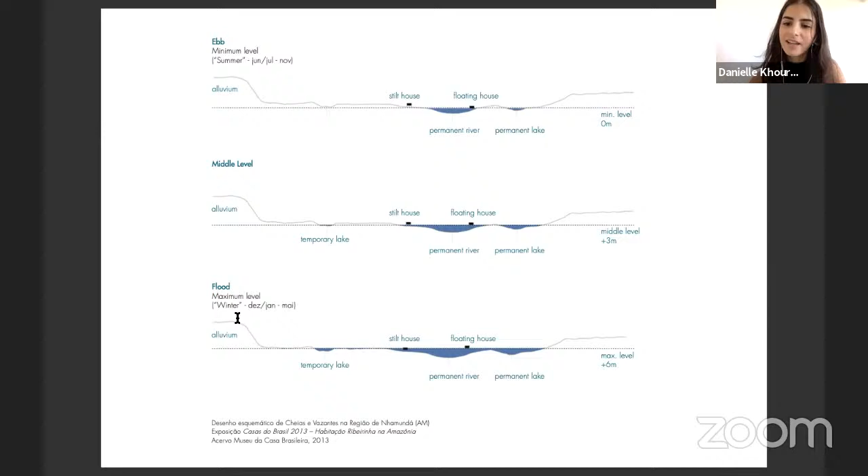Depending on the time of year, the width and extent of riverbeds change, islands disappear and reappear, and lakes and ponds expand and contract. The rhythm of the waters not only changes the landscape, but also influences the life of the riverside populations, who have adapted their way of living to this annual variation.

In this way, the rhythm of the waters imposes the rhythm of life in the Amazon. Inhabiting the floodplain area requires adapting to the hydrological cycle of the rivers, and the adaptation of the population to the local environment is reflected in their traditional architecture.

There are basically two different types of housing, the stilt and the floating houses, and both present solutions that bring inventiveness and adequacy between technique and the environment.

The stilt houses are built on wooden pillars. They have a simple configuration, usually with only one room that works as a bedroom, a living room, and a kitchen. This type of layout allows good ventilation of the internal space of the house, being an example of an adaptation to the local climate.

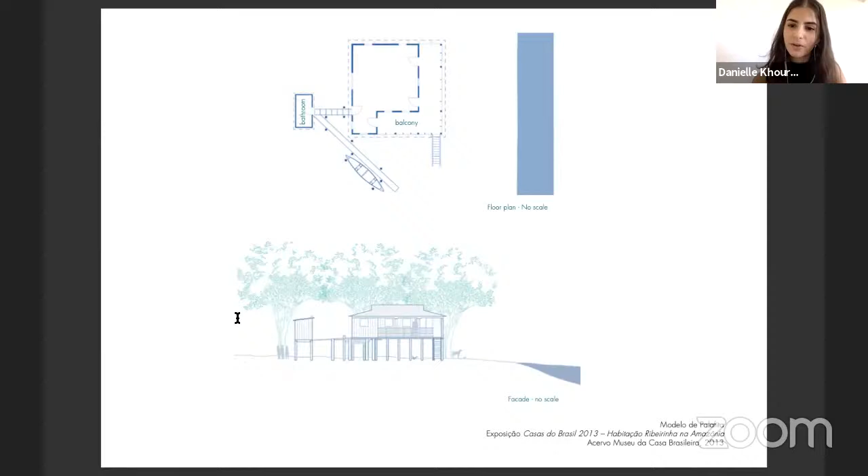The house is built using local materials found in abundance, such as wood, jungle vines, and leaves. Floating houses resemble the stilt houses in the choice of construction materials and layout, but differ in that they are not attached to the ground. They float on water, being able to change places, and in addition have the advantage of being less vulnerable to river floods and ebbs.

The traditional house is built on logs of açacu, a light wood with low density that floats on water. It is a typical tree of the floodplain forest, so it's very resistant to water and can be used for more than 40 years. This traditional architecture was the main inspiration for my project.

The project proposes a housing complex in the city of Manaus for the low-income riverside population living in precarious and risky situations. Manaus is the biggest city in the state of Amazonas, located in the center of the Amazon Basin at the strategic confluence of the Negro and Solimões rivers.

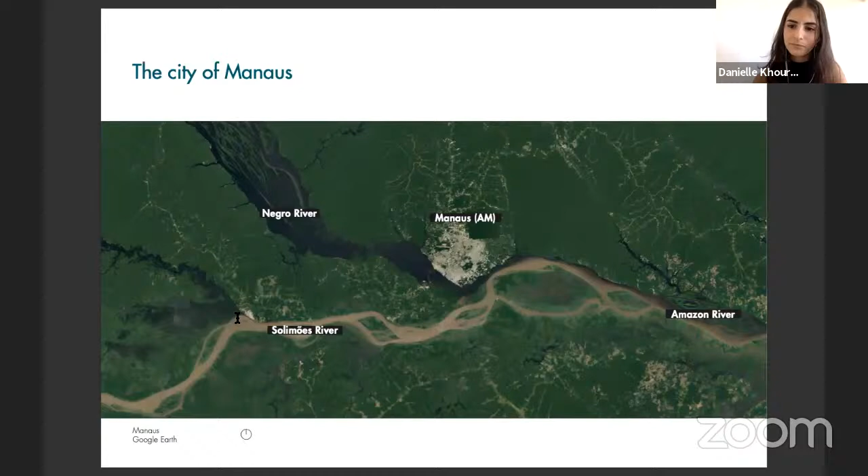The city faces today a major housing crisis. With the lack of public policies and efficient urban planning, part of the population began to live on the banks of the rivers in an inhuman and precarious way. In these occupations, the lack of sewage and garbage collection is frequent, aggravating the environmental degradation of those areas and facilitating the spread of diseases.

Some housing projects were built in response to these problems. However, in general, the architecture and way of life traditionally developed by the riverside populations were ignored, generating dissatisfaction and difficulty of adaptation by the relocated residents.

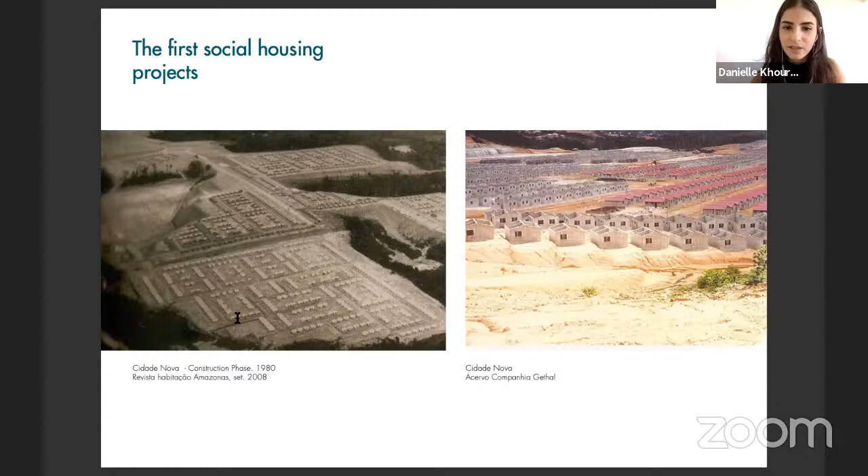The Brazilian social housing projects had mainly a productive and quantitative basis, and the production of constructively standardized buildings was intensified. Widespread formulas were adopted in many Brazilian cities, which disregarded urban, social, and cultural local specificities.

So this work is a criticism of the current production of generic models that ignore the particularities of the Amazon culture. It emphasizes the importance of rescuing the qualities of vernacular riverside architecture, incorporating features in its design familiar to the residents of stilt and floating houses. Therefore, it allows the residents to identify with the house while valuing the Amazonian way of life and local knowledge.

The housing complex is located on the banks of the Quarenta River, a region currently occupied by irregular stilt houses.

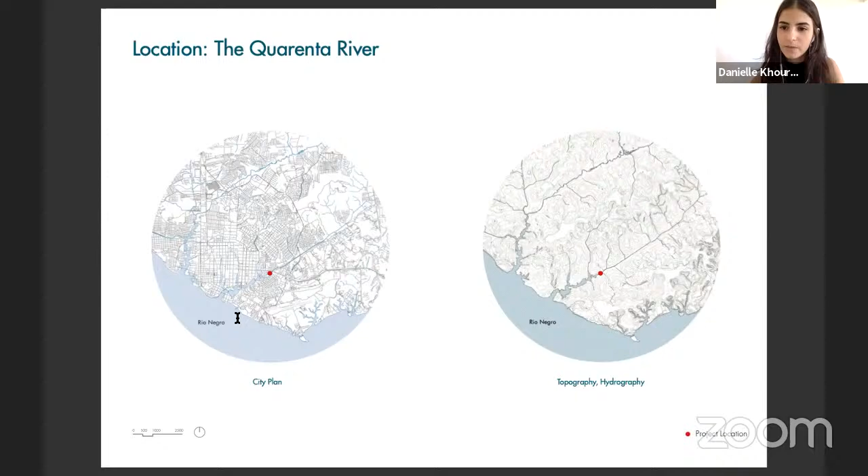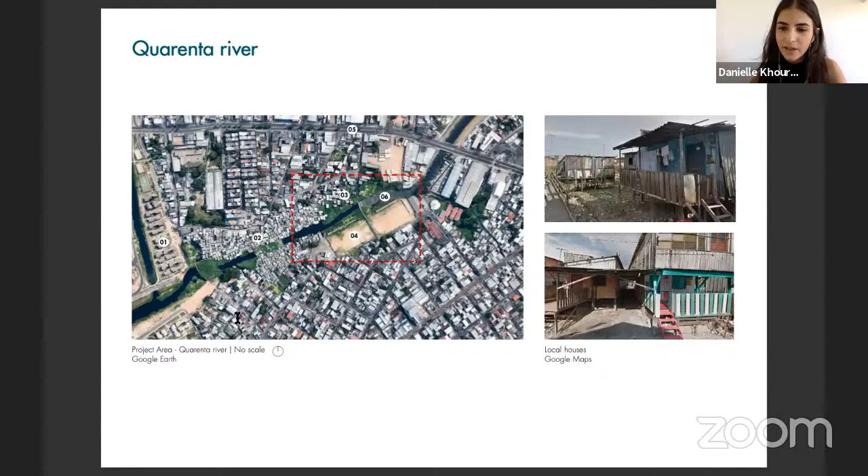The intention of the project is to provide a housing alternative to residents who live in dwellings at risk of flooding or collapse. The design of the housing complex was inspired by traditional Amazon architecture in such a manner that the building is in harmony with the people and the natural landscape.

The level of the Quarenta River has an annual variation according to the seasons of floods and ebbs, and this variation was taken into account when developing the project. The results of the analysis led to the establishment of 3 distinct levels: one variable according to the water level of the river, one at the level of the street, and a third one elevated.

At the variable level, a space is created for diverse uses like resting and fishing, allowing for a continuous dialogue with the local landscape. At the street level, there are spaces for social and cultural activities, and the dwellings are located on the upper floor.

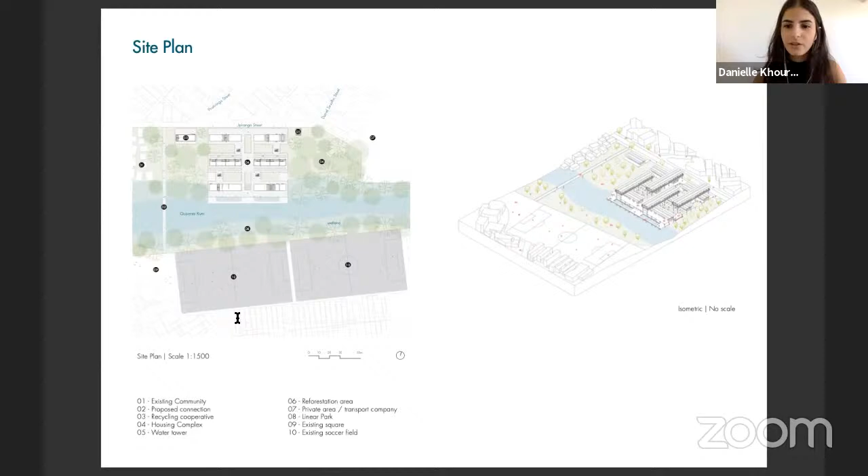The building's implementation was designed to ensure harmonious integration with the surroundings. A connection with the other side of the river is proposed, facilitating access for the region's residents into the cultural spaces situated in the housing complex, and at the same time integrating the leisure areas located on the opposite bank.

The building is not only restricted to housing use, but also serves a purpose in providing social facilities, markets, and spaces for leisure and rest — features that are essential for human development.

An emphasis was placed on programs associated with job creation in an educational and cooperative manner, using local know-how to generate income, like a fish and fruit market, a boat building school, a bakery school, and a recycling center. The project also holds a canoeing club, which promotes physical activity and reestablishes the relationship between man and water. In addition, the housing complex has ample external spaces, encouraging contact with nature and promoting community life.

So the project not only offers quality housing, but also a space that fosters culture and leisure activities, and as a result, a sense of community is created and empowered. Access to those activities is intended not only for residents of the building, but also the surrounding communities. In that way, the project generates a micro-local economy and a cultural center for the region.

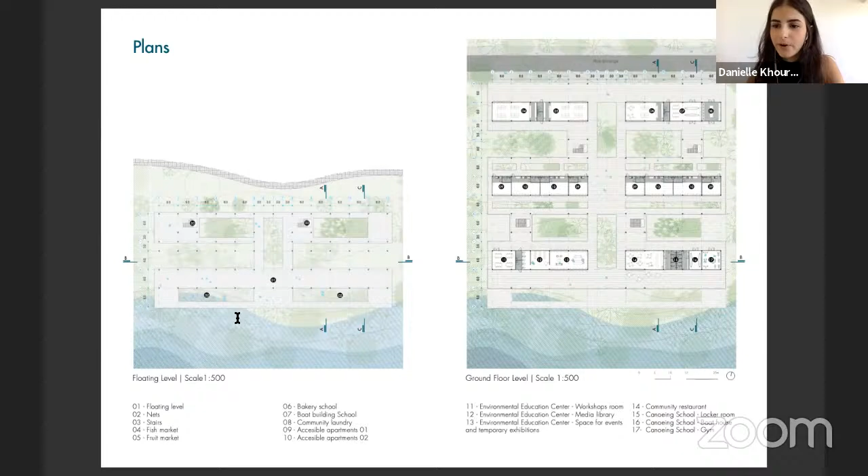Close to the river, we have the cultural and social spaces like the canoeing club and the community center. In the middle, there are the apartments for physically impaired people and the elderly. And parallel to the street are the markets, the bakery, and the boat building school.

Here you see the upper floor where there are the other apartments, and on the right, the roof plan with the solar panels. Here we see sections and facades, and this is a section in perspective showing the 3 levels.

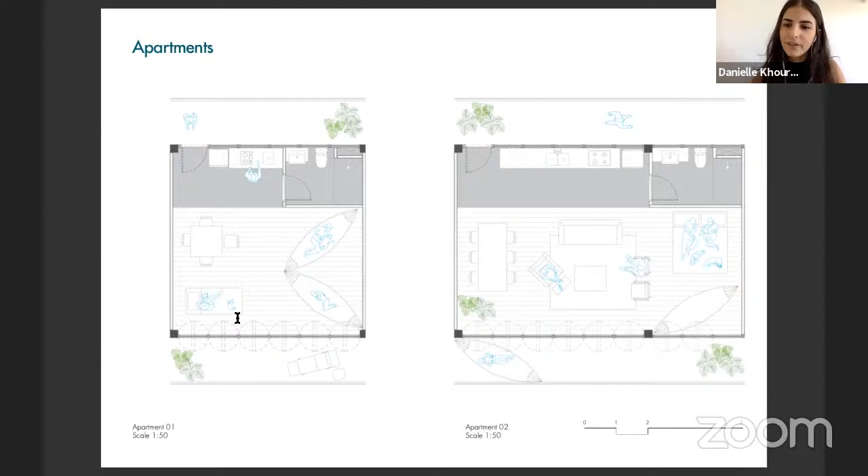There are 2 types of apartments, one with 36 square meters and the other with 54 square meters. The units have few internal partitions inspired by the typical floor plan of the riverside dwellings, and the idea is that residents can adapt the units according to their needs. These are the units from the ground floor that are adapted for wheelchairs.

The material used for the main structure is Itaúba, a local wood with high durability and resistance to humidity. It is used in the pillars, beams, and trusses, and the advantage of using reforested wood is that it absorbs carbon dioxide during growth and generates less residue during the construction phase.

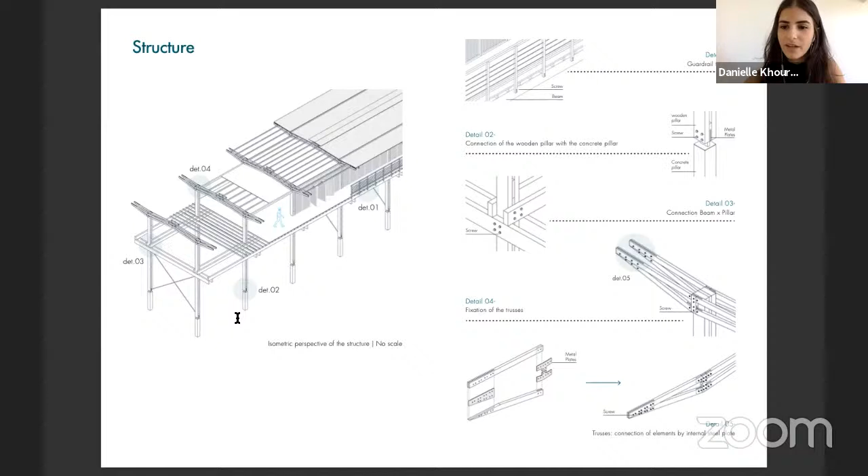The pillars are made of wood and concrete, and this second material is used at the base of the pillars where there is direct contact with water, ensuring greater durability of the structure and preventing damage to the wood. The roof plays a fundamental role in guaranteeing thermal comfort to the building, because it is through it that the greatest thermal load is transmitted.

So it was designed to achieve a good adaptation to the local climate. The roof has 2 layers: the outer layer shadows the inner layer and minimizes its heat absorption, avoiding the heating of the building's interior. The heat accumulated between the 2 covers is removed by ventilation through an upper opening.

The overhangs prevent direct sunlight from reaching the interior of the building during the hottest time of day, while also protecting it from intense rains. The high humidity and elevated temperature of the region can cause a constant feeling of thermal discomfort.

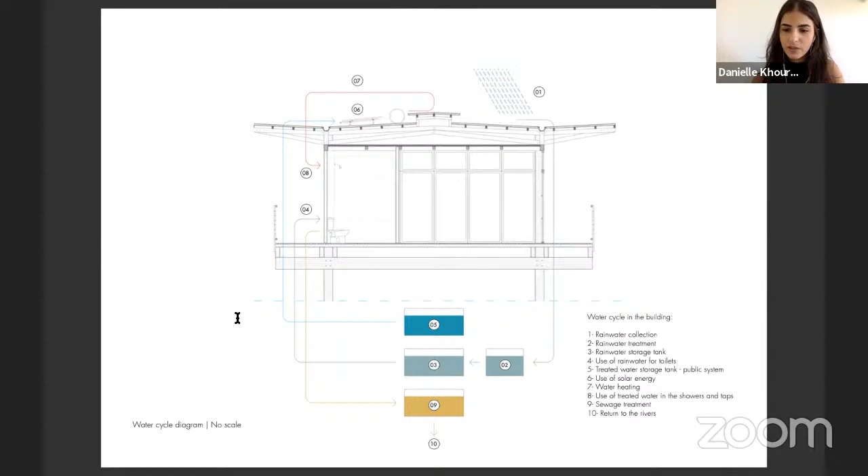Therefore, it is necessary to promote dissipation of heat through ventilation, and for this purpose the building is open to capture winds. This is done through external panels which have an area for permanent ventilation. The building is also elevated from the ground, providing better exposure to winds while also allowing air movement below it. Rainwater is harvested and utilized in toilets, and sewage water is treated so it does not further pollute the rivers.

Here we have some 3D images. This is a 3D image of the apartment. Another image from the apartment showing the large windows for ventilation, a view from the ground floor during the flood season, and a floating level with external spaces. This is the circulation and external area.

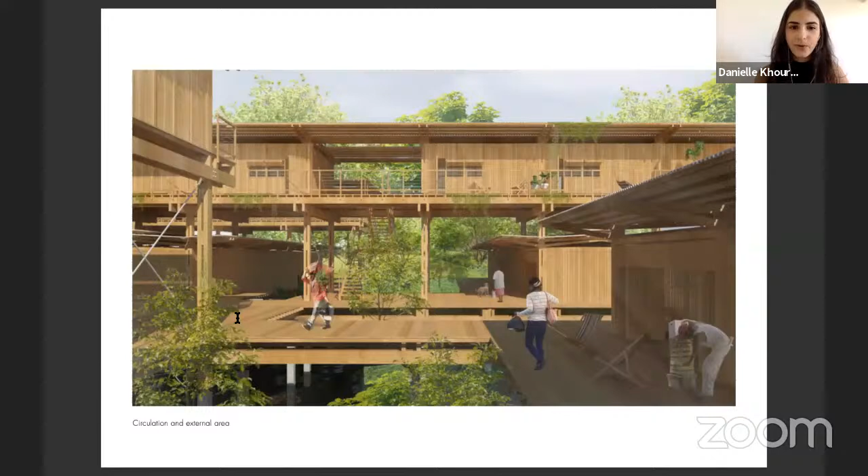Thanks a lot, Danielle. So we are now going to move on to Othmane. Yeah, can you hear me? Yes, perfect. I'll try to. So over to you. Share my screen. Just a second. Yeah, all good. All good? Please. Perfect. Yes.

Today I would like to present the work that we produced at the Polar Lab, which is an academic research platform of Antarctica 2020, a cross-disciplinary project that has an interest in conceiving and shedding light on a very mysterious continent, not very well known. In fact, for the 2020 anniversary, the project aims to freeze and map the evolution of Antarctic architecture and Antarctic climate, producing a body of research that would be debated at the next Venice Architecture Biennale.

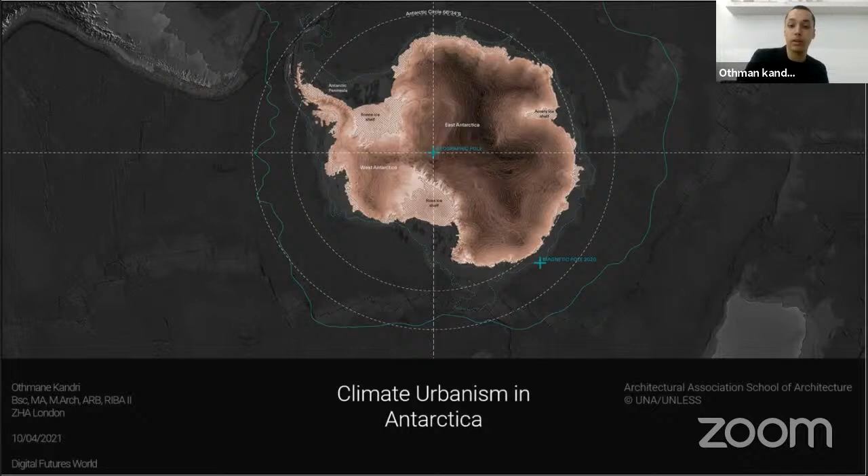Okay, so we can start with the geographical location of Antarctica, which is the Earth's southernmost continent, and it contains the geographical South Pole. It is situated in the Antarctic region, almost central south of the Antarctic Circle. Antarctica, on average, is the coldest, driest, and windiest continent, and has the highest average elevation of all the continents. Most of Antarctica is a polar desert, where about 80% of the world's freshwater reserves are stored, enough to raise the global sea level by about 60 meters if all of it were to melt. So try to think about the impact of this on our cities. The temperature usually varies from minus 90 degrees to 20 degrees Celsius.

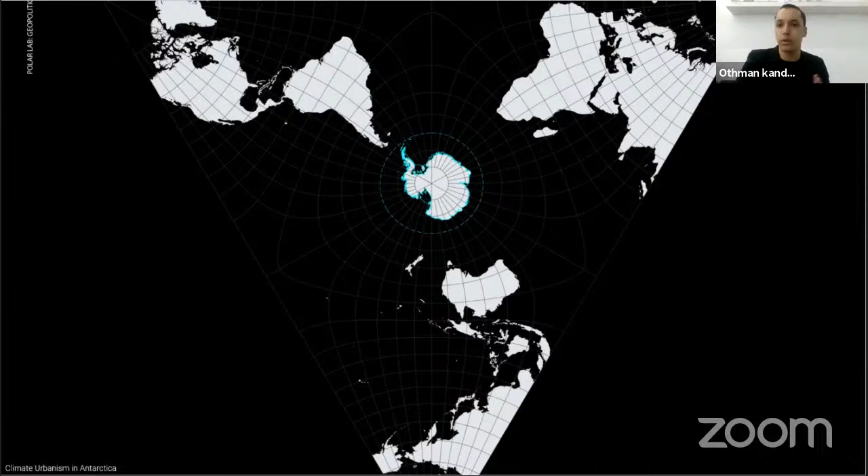The fast melting of the Antarctic ice cap induced by global warming will gradually alter the international geopolitics, because the territory of the Antarctic is a very important strategic outpost to ensure access to research and science that is done on site, and energy and commercial resources, as well as a very important military strategic area.

However, the science is very clear: climate change is already negatively impacting Antarctica, and the problem of human-caused climate change is now very well known, which is the concentration of greenhouse gases in the atmosphere, well above pre-industrial levels, due to our use of fossil fuels, but also deforestation, agricultural practices, and ultimately urbanism.

So each summer, a significant amount of meltwater is produced. The climate in Antarctica has warmed by 3 degrees, meaning that since the 50s, there has been a loss of almost 25,000 square kilometers of ice shelf.

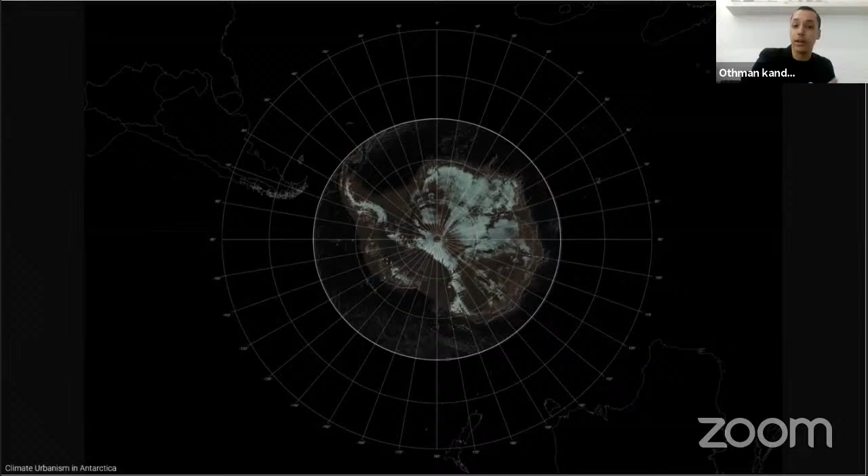Here we can see how during winter the continent creates new ice formed from the ocean water and general snowfall. When a certain threshold warming is reached, these regions might start melting significantly, and when the temperature comes down again, the ice will not immediately regrow. So we can read this continuous tension and compression of the entire system, based on one hand on natural behaviors, on the other hand on human behaviors that exist in Antarctica.

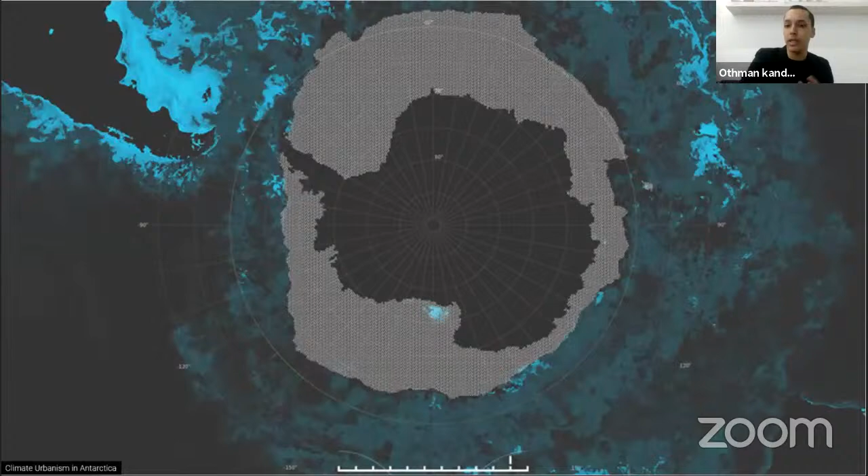Part of our agenda was to critically unveil and visualize this unique nature of human presence in this vast polar territory, because since the 50s, numerous research stations were built, introducing interesting typologies that look at technological solutions dealing with the climate and wind landscape.

As you see from this map, a number of governments have set up permanent research stations in Antarctica, widely distributed, constructed either on rock or on ice. There's a trend driving toward a sort of climate urbanism, based on the location of the base in the continent and on the political treaty. Most of them are located in a geographical area close to Argentina because of the shorter travel distance with ship and aircraft, and because of the warmer Antarctic surface temperature than in the central area.

So in the past 20 years, several research stations have been built, implementing building techniques that lead to development of mobile, responsive, but also zero emission structures. We tried to collect this data to map the architecture of the bases from several images, papers, and documents, and how the base is related to a specific climate and site.

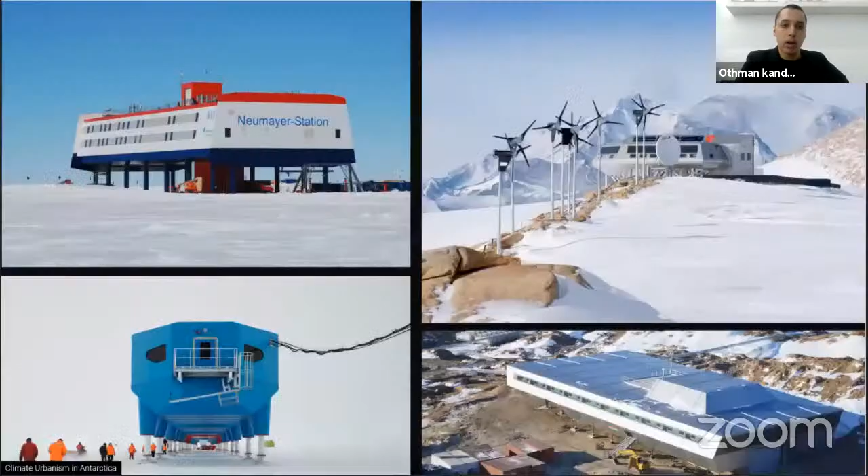To give you a little context of what it means building in Antarctica, these are very interesting examples. Most of the time, the client's brief is related to a typology easy to ship and build on site. The building has to allow for replacement of individual multiple facilities. They also try to minimize environmental impact with energy efficiency, reducing water use, improving waste management, and providing flexibility to support the scientific program done on site.

But looking at the same time at the wider context of the single base, there are interesting examples of territories like Punta Arenas and Hobart that become, in a way, the ports of entry into Antarctica. This strategic location promotes the development and flourishing of these places into logistic hubs. That's why the interest in urbanism, not only in the single architecture of the base, becomes even more relevant to address a sustainable order that considers the transportation of goods, waste management, and the construction of new infrastructure, minimizing gas emissions and land consumption.

Because this is the result, the idea of meaningful urban design is completely vague in a way, because there's an ambiguous mix of several issues to resolve within the site, such as the architecture of the base, the architecture of the landscape, and the overall planning of supporting infrastructure around the base. Questions arise, such as what is the relationship between the landscape and these new urban settlements, and what is the strategy to reduce the vulnerability of the climate and the overall natural ecosystem?

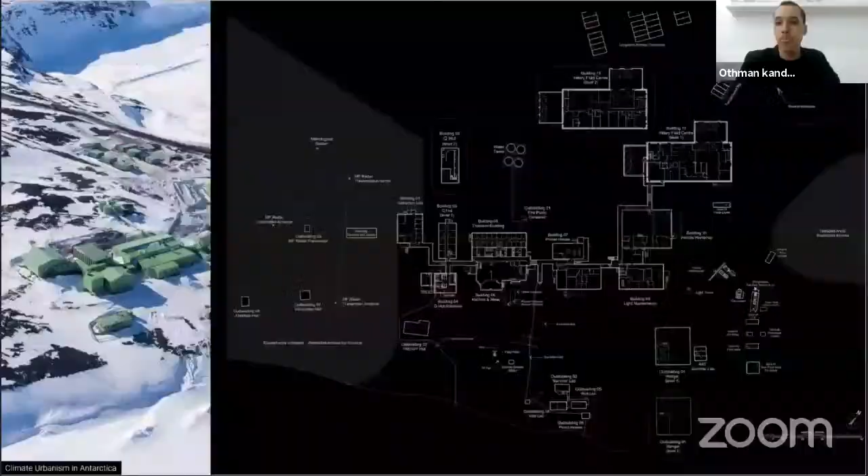This is a typological plan of a base. As you see, most of the time the result is a complex urban asset where the location of the central base deals with extreme climate and topography, as well as a huge amount of facilities necessary for the operation of the base, such as fuel tanks, workshops, power facilities, parking areas, and most of the time a runway for aircraft.

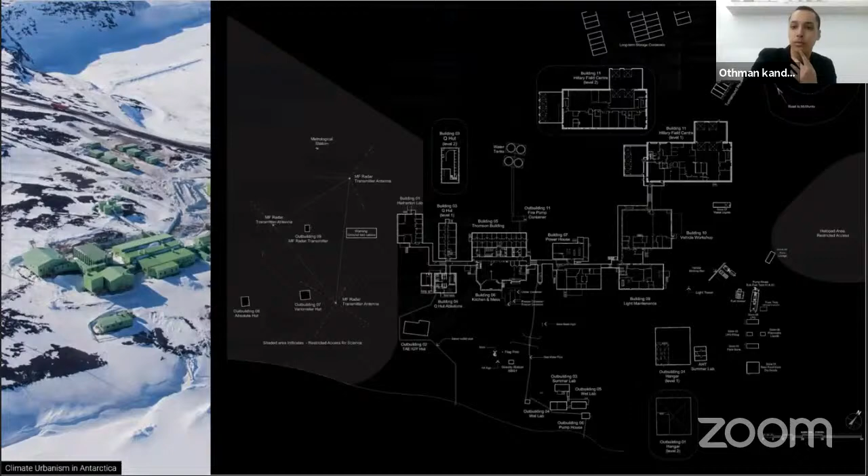An approach that transforms quantity into generic efficiency through compact massing and repetition. And it is also worth remembering that buildings in Antarctica probably have the largest construction carbon footprint of any buildings in the world.

We try to map this data. Everything has to be flown or shipped there, and anything that can fit into an aircraft has to be assembled elsewhere and then shipped several times—a process of accumulation that ultimately generates what we call today a city.

Mapping and visualizing this data allows us to run simulations through parametric design that visualize current and future scenarios of a specific base. As an additional study, we looked at the impact that each station had on its context.

According to its master plan and configuration, and numbers of elements such as equipment, logistic facilities, the number of buildings for each base, and the overall area that occupied the Antarctic soil. This gives us an overall idea about the energy production that every base needs to operate throughout the year and its carbon footprint.

That's why I think it's important to look at the continent as a unique urban asset towards net zero carbon emissions—establishing a representative network of marine protected areas which are less likely to change, implementing biosecurity measures, and putting into place a new management system able to incorporate climate resources and respond to new types of landscape urbanism. And this is my last slide.

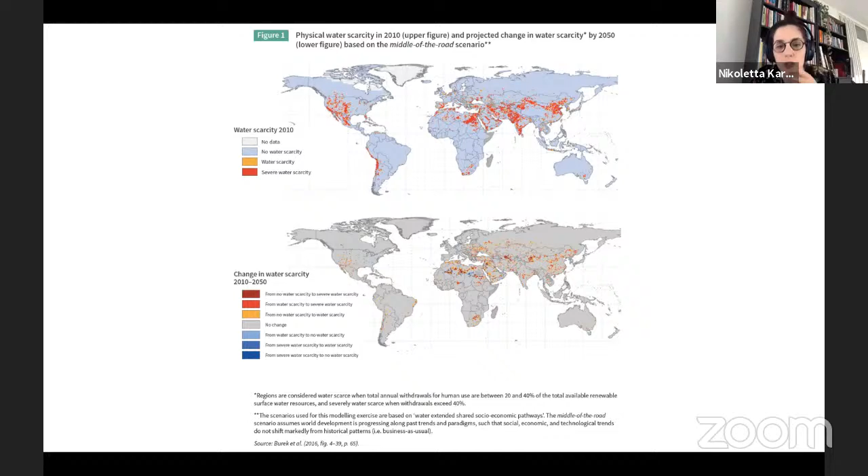One of the ways we can help provide water in some of these areas is through a fog harvesting system. How does it work? Typically it's installed in coastal areas or mountainous areas with high altitude. A cloud containing water particles passes through the tower or the mesh.

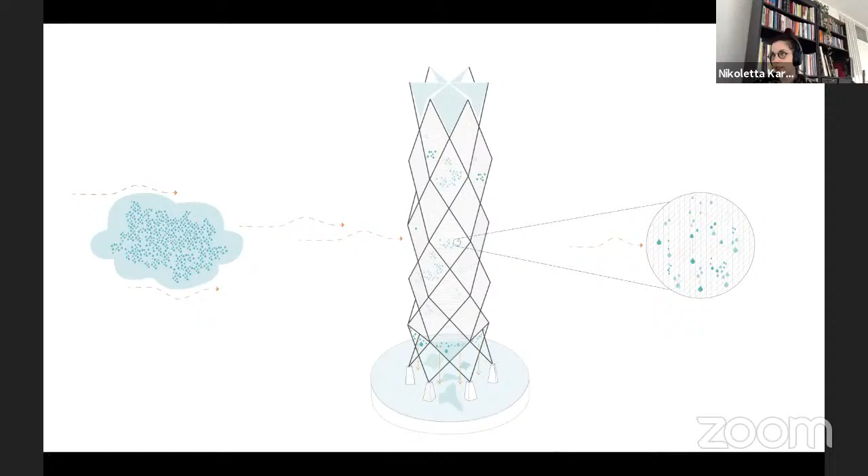The mesh captures those water particles, and with gravity, they travel down the structure and get gathered in a tank. Now Alberto will take you through the concept of the design.

Well, yes. So this is the first stage, the conceptual design that we started years ago, in which we define 4 parts of this conceptual tower.

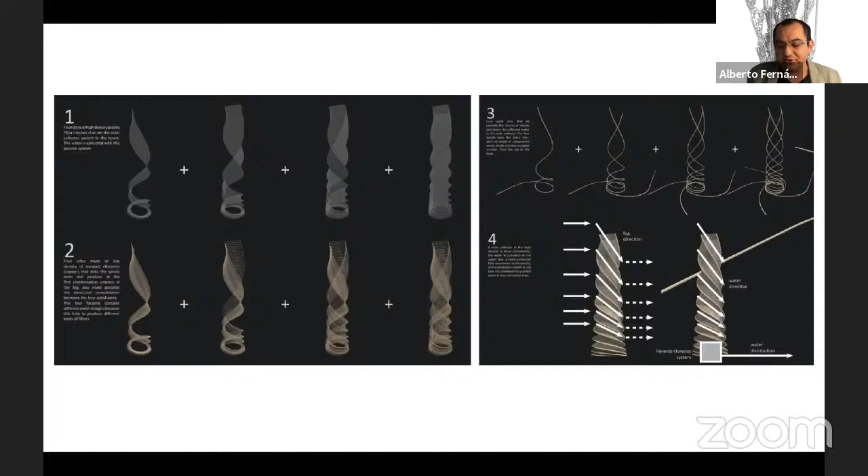The first one is the most important, the net that is capturing the water. The second one is the reinforcement system, a little framework that can reinforce the full system, trying to improve the quality of the water capture during the process. The third and fourth parts are more structural, but all together they create this idea of a vertical device that can capture and increase at the same time the contact between the net and the cloud, improving the quality and amount of water that we can get from the air.

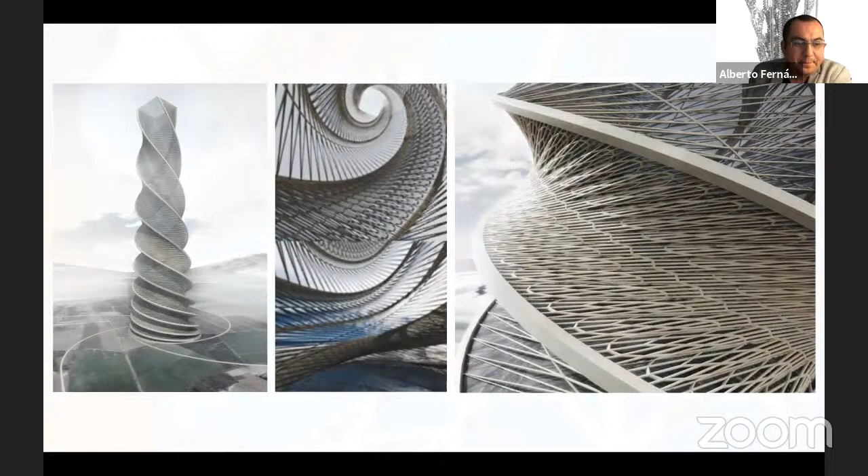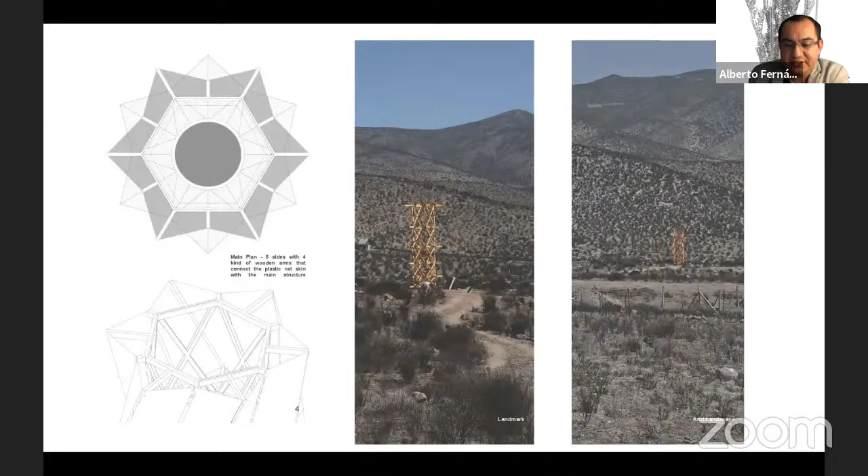Then we have the second stage, the structural prototype, with the main focus of trying to create a highly compact structure that can be easily assembled on site by 3 workers, with all parts no longer than 1.5 meters. So then the full system looks like this. This prototype was built in some hills in the north of Chile without any other things around it.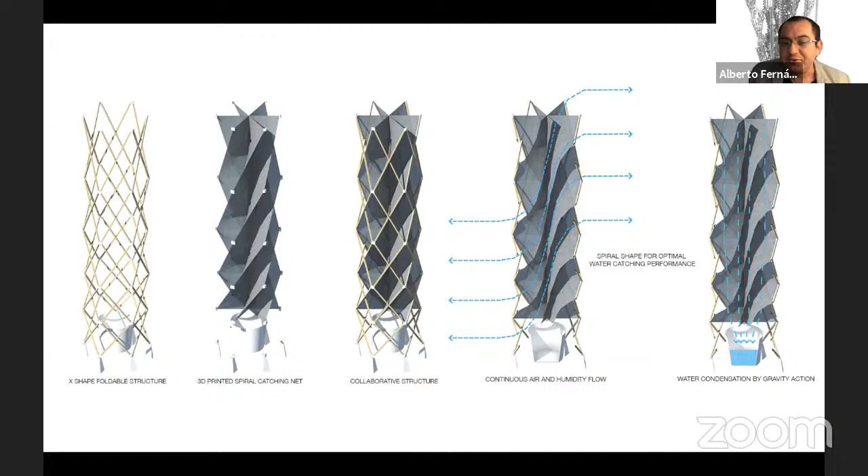Then we were working with 36 3D printed joints that can create this easy structure, in terms of having again 3 workers working just in one day, and the final result was this: near 10 meters height tower that can catch water in a vertical way.

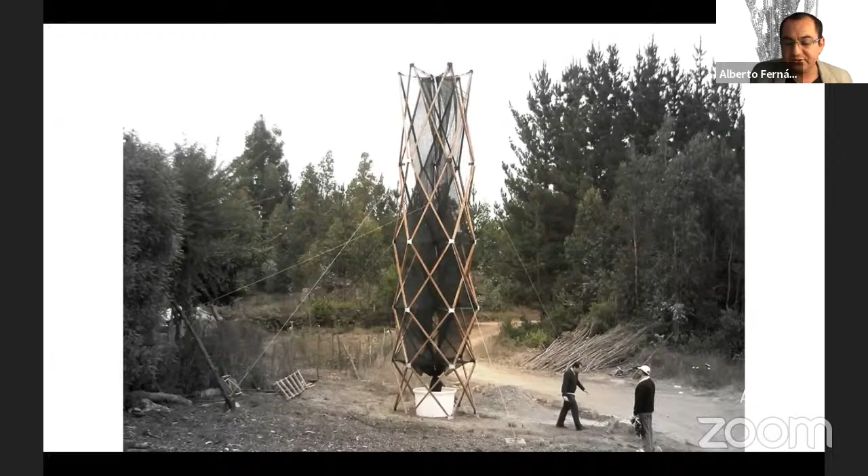So we have this focus about how to improve the quality of life for isolated communities or isolated families across these coastlines in all this South American area.

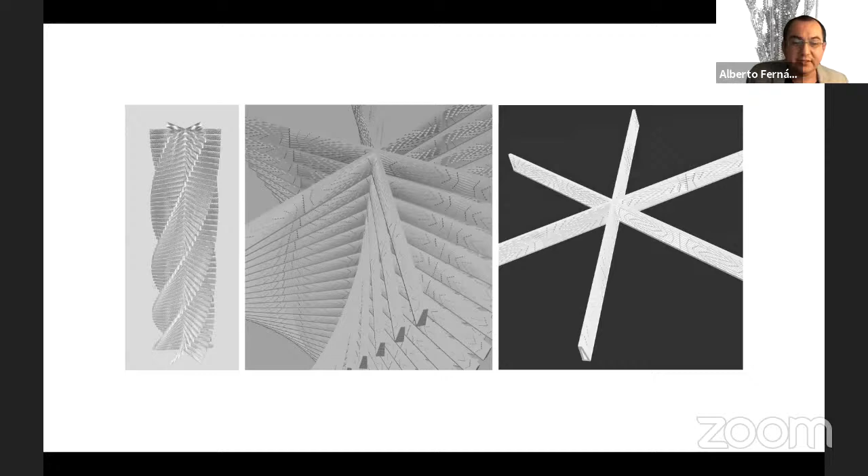After that, we realized that one of the most important things is trying to reinforce the capture structure inside these towers. So we started to think about 3D printing a secondary system that can collaborate in an active way with the net that is actively catching water. So we developed this visual algorithm that can create and iterate this idea of 3D printed blocks.

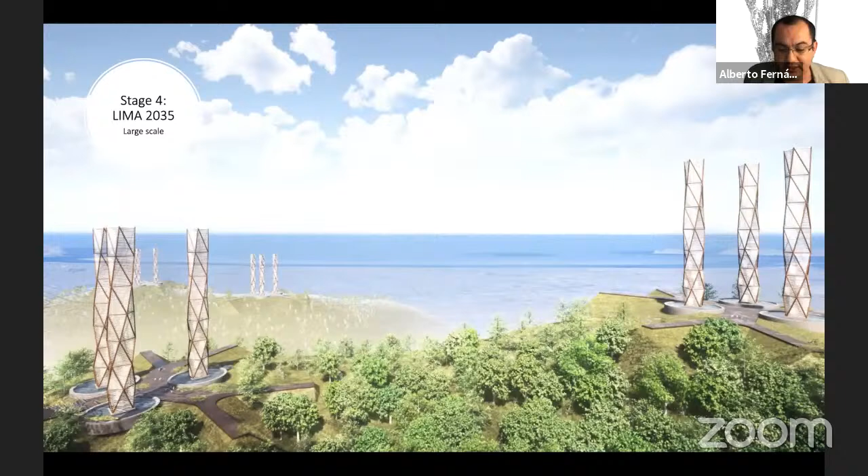And now we are working on stage 4, working with the organization Lima 2035, in collaboration with the Rockefeller Foundation and with local communities. So, a very brief information.

Now going to our current thoughts for the final prototype that would be in Lima: we're thinking of this prototype as a 2-system structure. One would be initially the more rigid, easy to assemble structure, and then we started to think about the idea of a component, because one of the main issues that fog harvesting towers currently face is maintenance.

The net itself gets torn apart quite easily. So if it's a component that fails, potentially you would be able to replace the component instead of the whole net, and you would have better control over the structure.

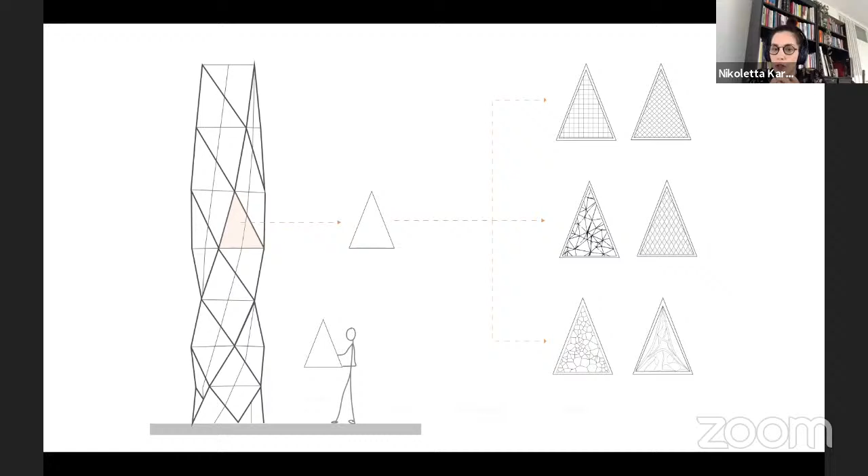And the other thing we're thinking is that you have the component, you have the textile structure, and then you also have an extra reinforcement, which could be 3D printed. Within that 3D printed mesh, we also started to think how we can maximize capturing water, maybe even by having small extrusions or things that would really help us capture the maximum amount of water.

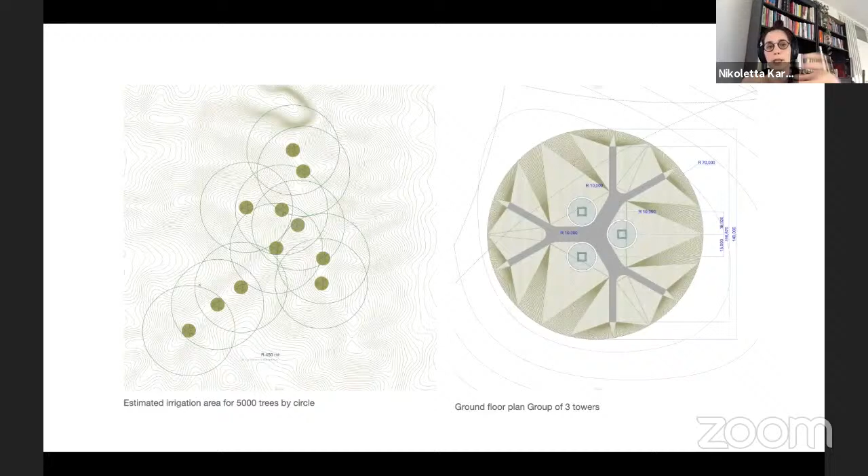So in the next slide, you can see there are 2 different types of prototypes. This one is a large scale prototype, and it has those 3 towers that work as a group together. These towers actually serve an irrigation area of 5,000 trees.

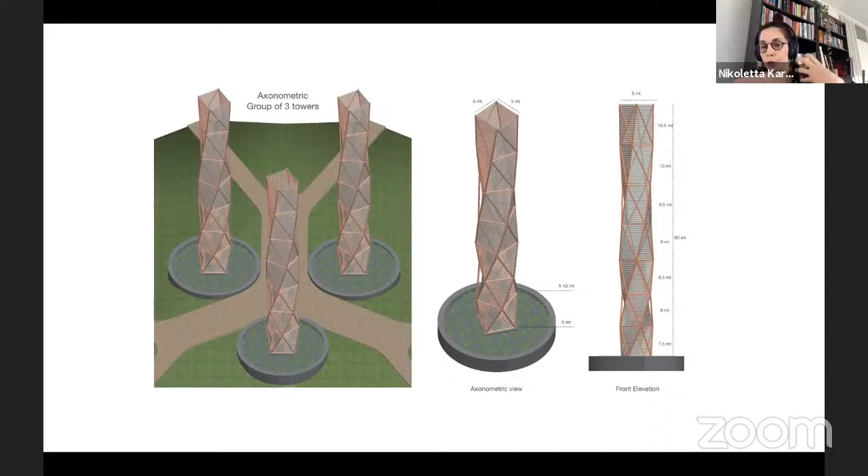It is important to note that to do this work, we really need to simulate and understand the wind pressure and how that affects our structure, and how through design, putting those 3 towers together, we can start maximizing the way we capture water through the various surfaces. So one tower is not as effective as 3.

In the next slides, you can see a few images of how we envision that potentially being part of the green regeneration and part of a public park.

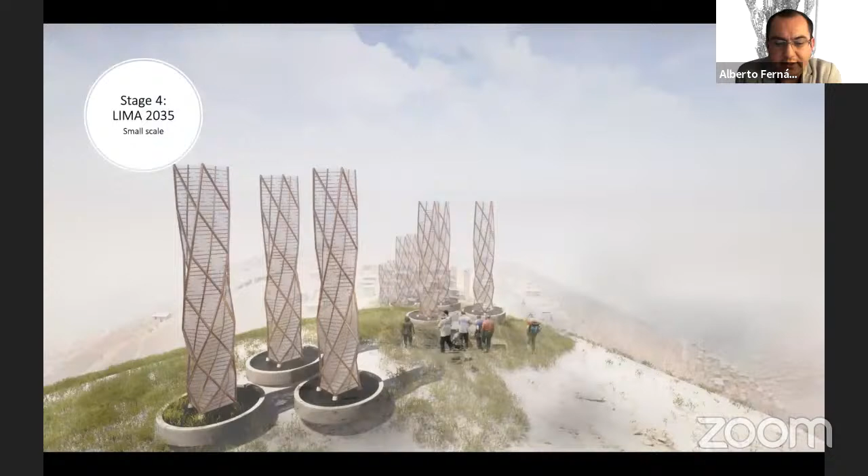In parallel, we have this other scenario, the small scale, working with local communities. In this one in particular, it's the Swan community in one of the hills in Lima. We're working with the same principle of 3 towers working together, with a total of 27 on this hill. We're now producing 120,000 liters per day at maximum capacity.

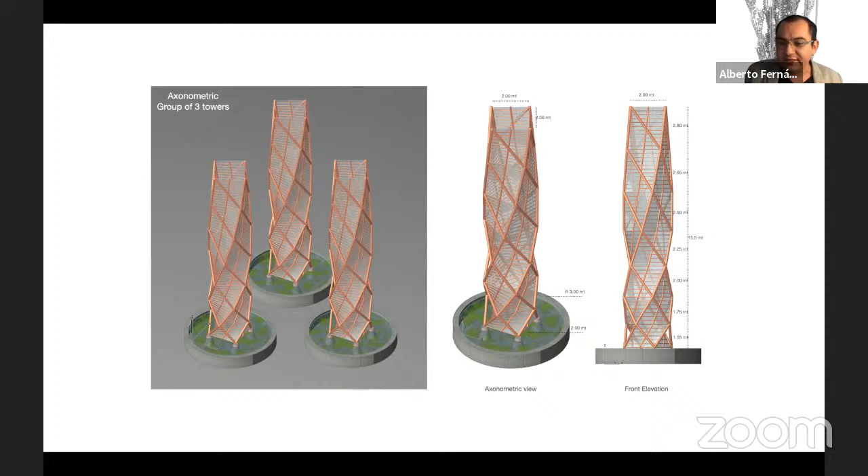It's similar to the bigger one, but with some variations, including the triangulation system. It's more efficient in a certain way, and at the same time we're thinking about this idea of folding or unfolding a structure. We tested the system again, modeling the full topography, trying to place every group of 3 in the most efficient way possible.

We're understanding that the same phenomena of 3 accelerating in a certain way are accelerating the wind in between, and at the same time increasing the amount of water particles clutching between them. It's working the same way, and the increase in efficiency is 50%, which is huge. This is one of the last images we have here, showing the objective of this virtual scenario in which the community can grow later around this new set of towers.

Now we are exploring the idea of how to reinforce this triangulation using a hexagonal pattern as a component that can create a stronger relation between the structure, the net, and the 3D printer process.

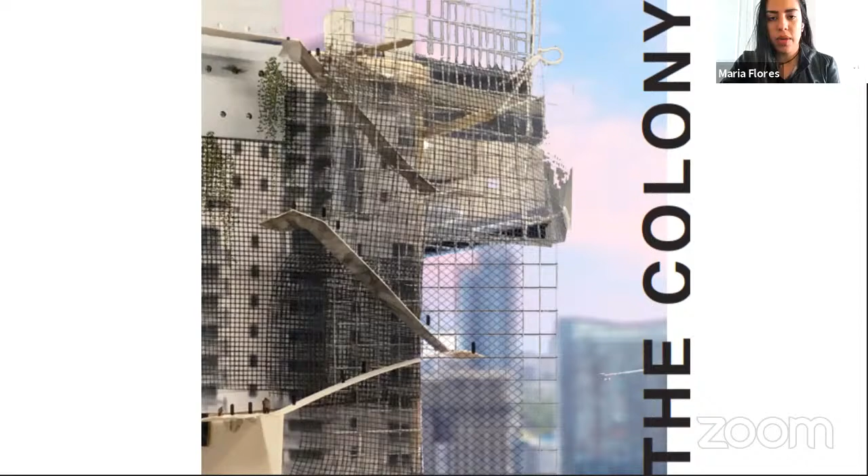Hello everyone, my name is Maria Flores. I'm from Florida International University. I actually graduated about a year ago. Now I am working at an architecture firm, but while doing some research on climate change, I developed a project I would like to present to you all today, called The Colony. I did this project as a one-year postgraduate master's degree, along with Professor Neil Leach and Alice Reed from FIU as well. I would like to talk a little bit about the project, what I found interesting, and why I started pursuing this.

Being from Miami, actually I'm from Caracas, Venezuela, but living in Miami for about 12 years, I realized that Miami as a city is very beautiful, extremely cultural. It's a melting pot for cultures around the world. But I realized that in the future, perhaps by the year 2100, we could be having some problems with water entering the city.

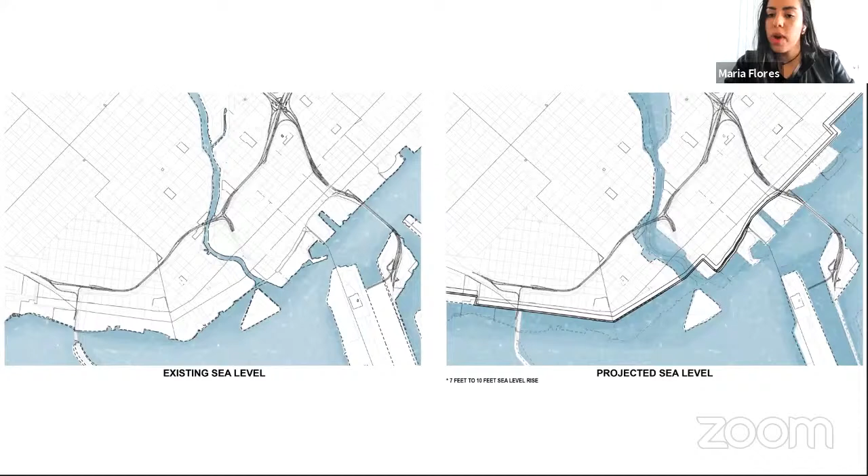So I said, okay, let's look at catastrophe. Let's look at hurricanes coming in every year, tornadoes, or whatever natural disaster could occur with rain. What would actually happen in the worst situation possible? As we can see, the pandemic was something we were not expecting, and it happened. So what if we actually explore and research a very catastrophic natural disaster that could happen to Miami, or any city within sea level that could occur?

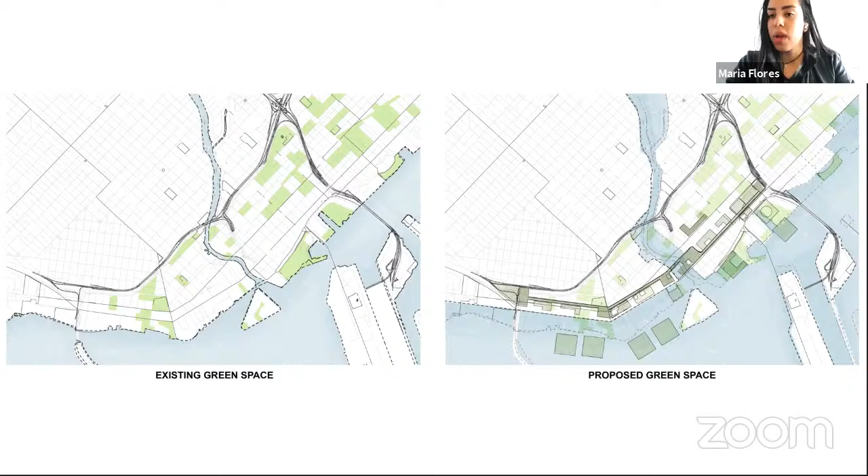So my projected sea level rise would be 7 to 10 feet in the next 50 years. So what would that mean for the next 100 years? My understanding was that here in Miami, we don't really have existing green space, we don't have parks within the actual city, it's mostly buildings. So I'm proposing to have more green space. But how can we do that? If the street level is going to be completely taken away by the water, what would happen to the green space that we have now and need as a society?

So then I started looking at maps. This is the Brickell area I was talking about before, where I mostly concentrated. What would happen if we start raising the street level? Instead of the street level being at 0 — here in Miami we don't have any mountains, any topographic elevation — what would happen if we actually raise the street level to 50 feet, 70 feet, 100 feet, and then start connecting the buildings to one another at an aerial level?

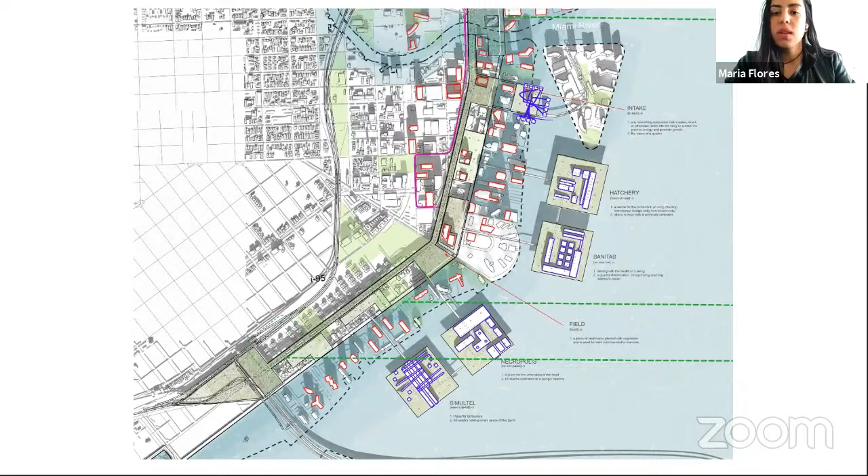And then actually creating islands that go outside of the bay and connecting them to the rest of the city. So this was an exploration I did of superimposing materials or any type of concrete structure on top of the sea level, on top of the water, creating an extra set of buildings on top of the water.

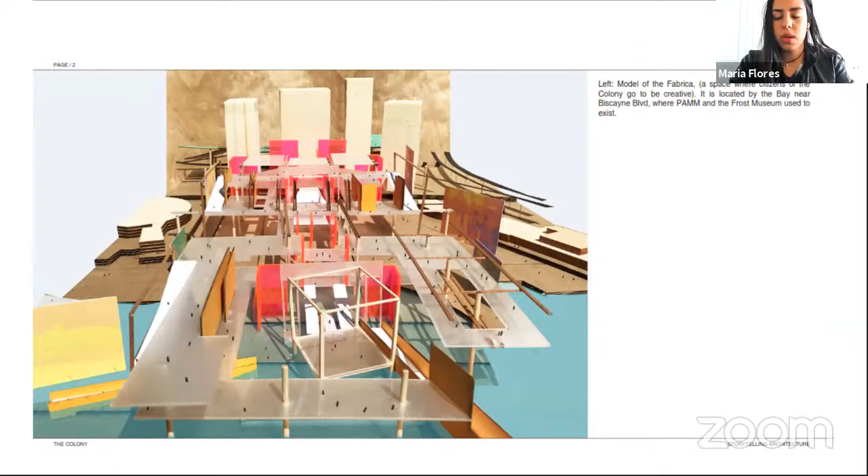But then I realized that when I looked at it, it wasn't really working — we were just creating more concrete structures, and that's not the point. The point is not to bring more concrete and more infrastructure to a city that is already getting depleted of its materials. So here's a model that I did to kind of understand this exploration a little bit better.

What would happen to the sea level rise coming in? How would people actually walk? And here you can see the platforms I was trying to incorporate into these buildings, and how to connect everything together.

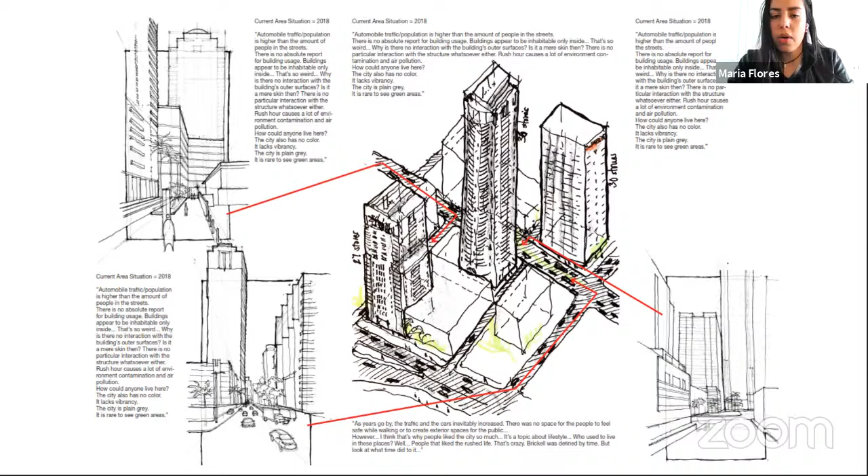So now, in the next year of my research, I started focusing on only one area, which had about 4 buildings in general. I started doing drawings because that's how I communicate visually and how I communicate understandings to other people. So I started drawing specific viewpoints of the city and how they would look if the water came in. That's where my understanding came about — what would happen if we tried to recover parts of the buildings and materials that are going to get taken away by the sea level rise.

Let's say the sea level rise comes in at 50 feet. Well, obviously below those buildings we're not going to have streets. We would have corrosion to the concrete, corrosion to the metals and steel that keep the structure intact, so we'd have to reinforce that. But what would happen to the materials that are now underwater?

That's when I started thinking about a different society. My project has one architecture, and then the secondary aspect of a new society that would be called the colony — a society in which we could have different types of people doing various roles. For example, we could have scavengers that would take materials from the water and actually start carving the buildings to better connect them to one another.

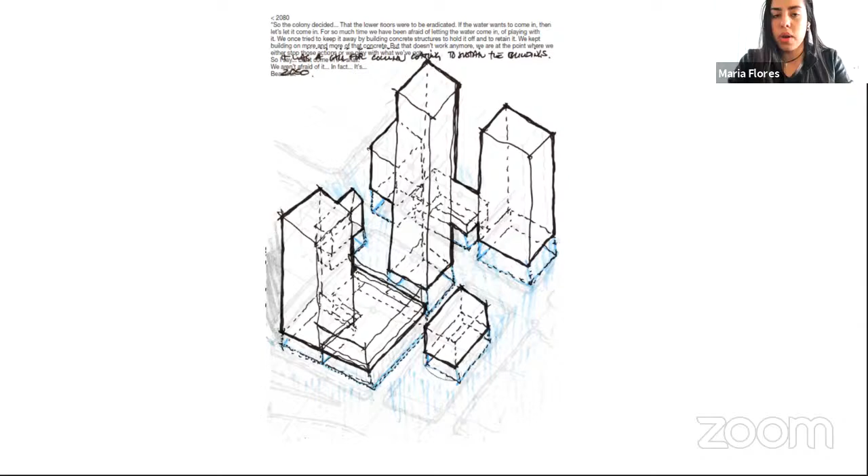So here we have the structure of the building, and what would happen is that we would take everything away — every material below the 50 feet to the street level — take that away and use it to create posts, concrete posts, or beams that could make a railing system or a street elevation at a different height, so we can start carving those buildings out, taking the materials and using them for something else.

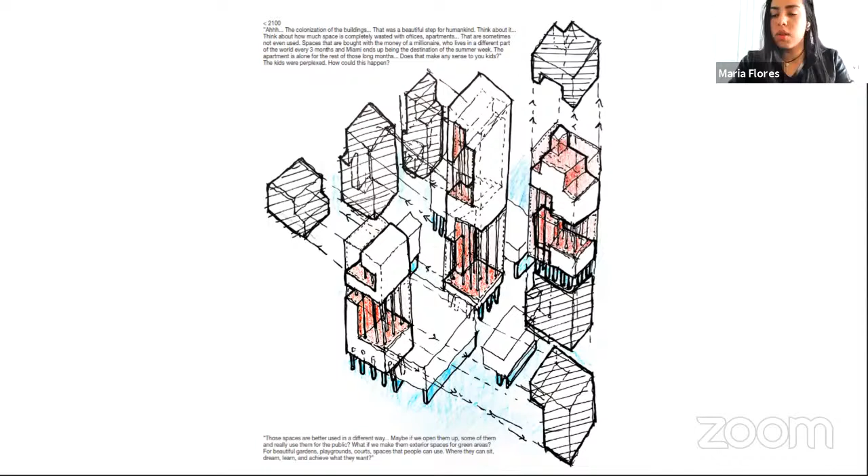What would happen is that if Miami stays like that in 100 years, the rich are the only ones able to keep the apartments — it's going to be better for their economy to rent out these amazing suites that are now on islands. So we want to take the advantage away from the rich and give it to the community. What would happen if we carve out apartments and actually make green space out of those carvings?

So then with those materials, we can start creating walkways or screens for people to actually walk around at different elevations throughout the buildings, and bring the street level now to 50 feet, to 70 feet, to 100 feet, and create a circulation.

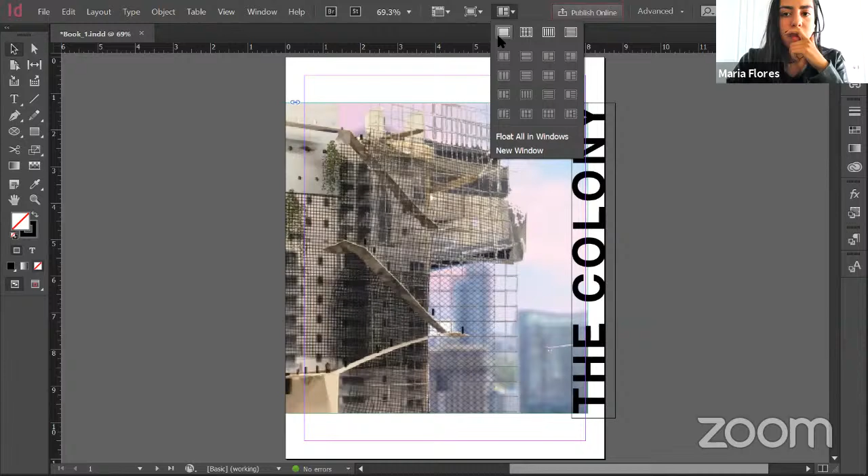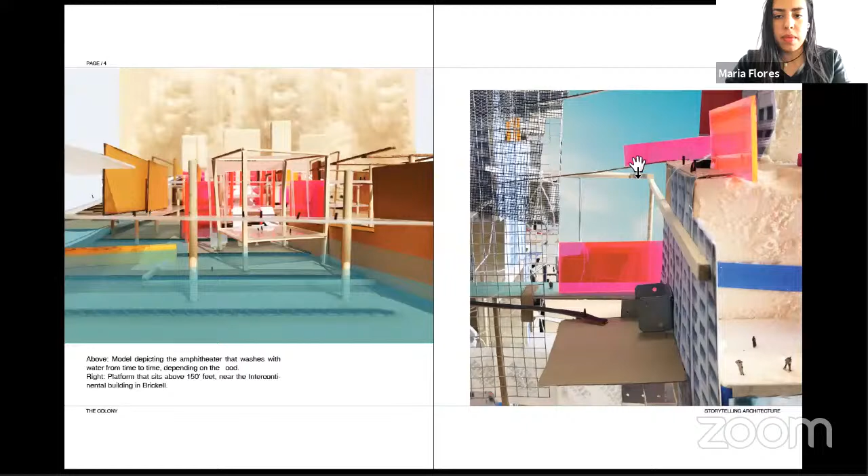Okay, so this is where I started looking at that small area of Brickell that I started to now explore in more depth. How could these stairs or circulatory systems actually be held?

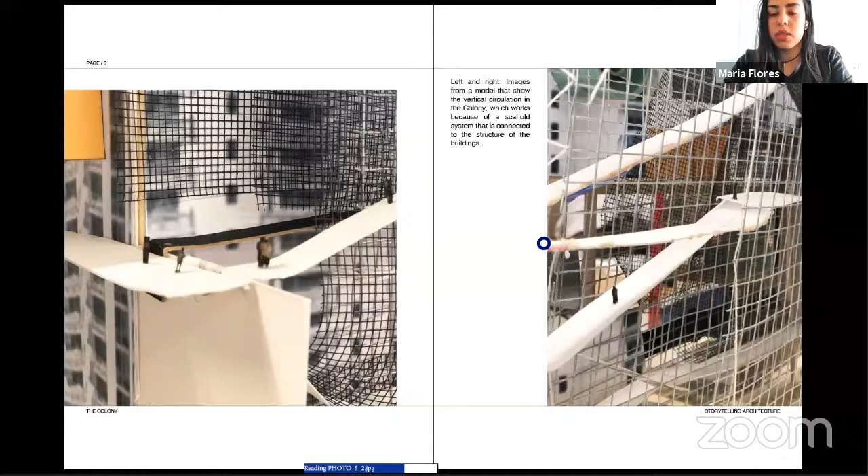We would need scaffolds. We would need structure that connects the buildings to one another. These columns that are now bare can now be used as a forest to create trees, to plant trees, and actually create green space inside of the buildings, inside of apartments.

And the interesting and fun thing about these models is the fact that I did them with materials that I would search, that I would find on the streets. As you can see, here's a receipt. And this is like plexiglass sheets, columns or little sticks that I found to be called columns.

So this is how a community would be created. You don't really need all these high-end materials to create something.

So then here is a model of superimposed Brickell in the back, where you can see the water in the back, and this new colony starting to create streets where people can walk around and use all the levels of the building for something completely different.

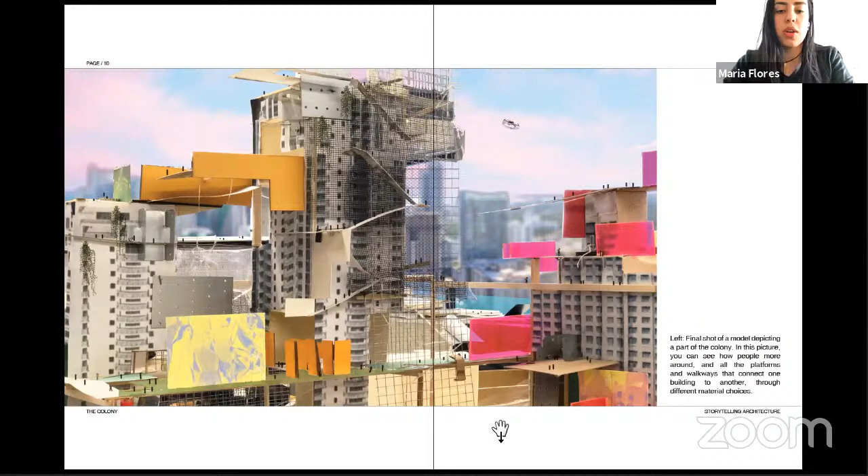It could be apartments, it could be green areas, it could be cafes, it could be restaurants, it could be schools, wherever you can fit inside of the building. And now we don't have to use the street level anymore.

So to kind of wrap this presentation up, the project also consisted of stories, right? And that's where I used, as I said before, my technical abilities in drawing to superimpose this with renderings that I created, showing a little bit more in depth about what I would visualize in these areas of Brickell and what could actually happen.

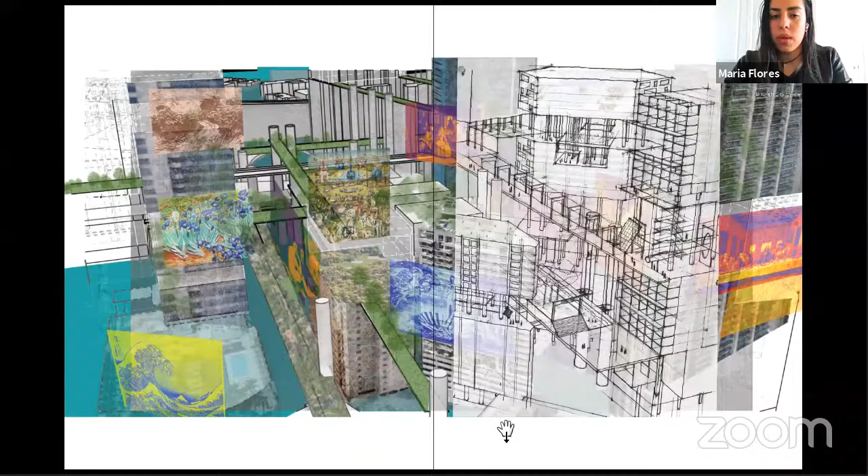So here you can see this could be an amphitheater or a park or something where people actually can walk around. So that's one. Then I would create these stories about different

personalities within the colony and what they can call a home. And I would have these comic book settings where I would show what it looks like to live within the colony, right? So this is a person that is waking up and they live in these pods, right, within the colony, and they go out and search for food.

This is a place where people go to actually rent a womb, and this is in the middle of the street. So they go in here to actually get a baby, right? So it's now a different society.

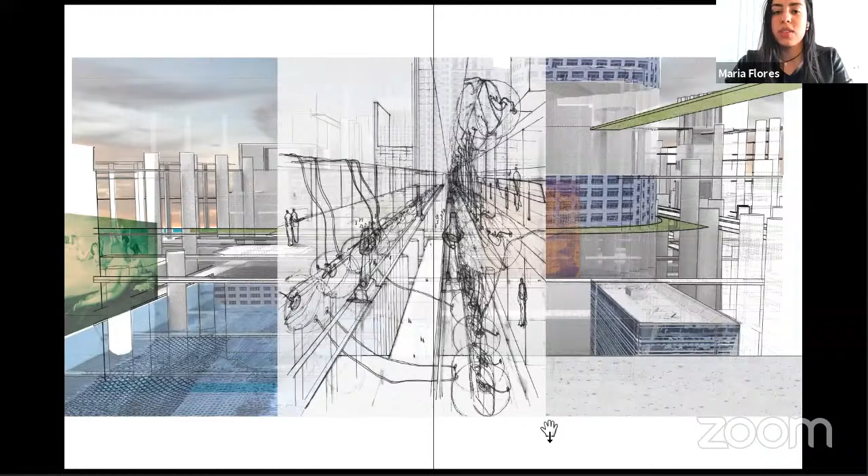And what could happen if we start to create a new community from a disaster, how to get away from that, how to build on as a community, and how to find a better way of communicating with others through the architecture. So here's the womb center.

Some people, right, creating these genetically modified babies or something like that. And then these are the parks.

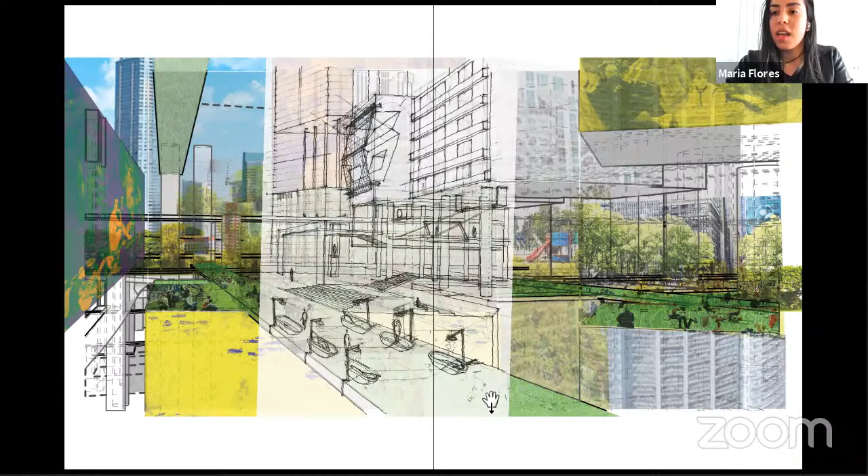Where do people shower? If we don't have apartments anymore, do people now shower in the streets, right? And is it okay to be naked in the street, right? So it was more of a public space and understanding about what as a society can we entail psychologically and mentally, and how can we live with this new understanding.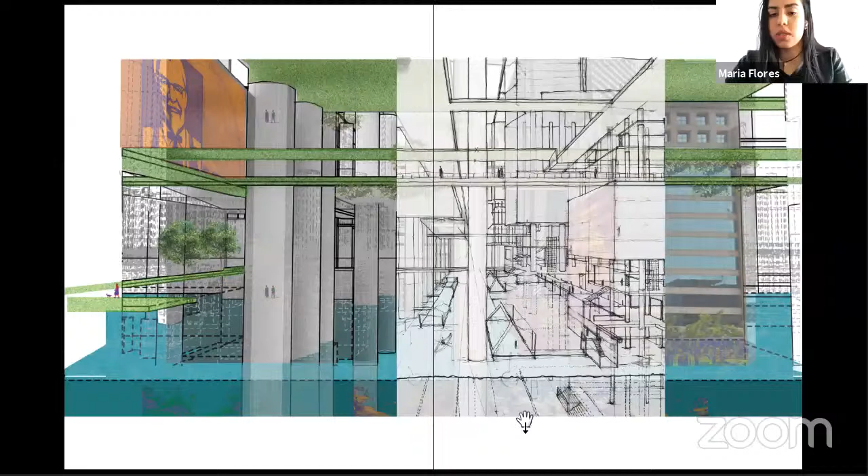Is that where scientists are going to be located to actually get us fish and food? Where are we going to get the food? These are the scavengers that are now going to be looking for different materials to continue building up the colony.

This is another sketch of how the colony was created and what happened to the migration. And now finally, these are the scientific labs where we have genetically modified foods, etc., which I call the crop lab.

And yeah, that's pretty much it. Thank you all so much for this opportunity.

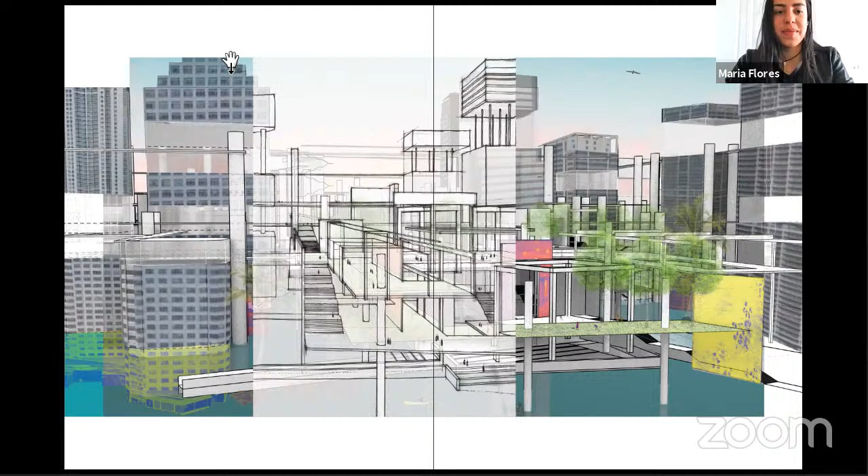Thank you very much, Maria, for bringing us around all these different speculative environments.

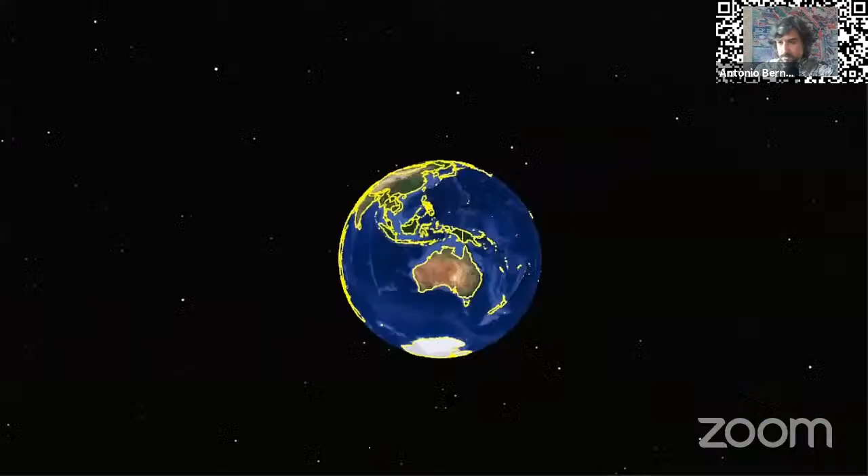Indeed, the city of Lagos, located in Nigeria, is the most populated city in Africa, with about 20 million inhabitants. As a result, the city is subject to many problems such as overpopulation, which causes lack of housing and increased urban promiscuity. Above all, Lagos is facing floods caused by the phenomenon of rising sea levels.

In addition, the presence of the huge Lagos City continuation project on an artificial island called the Eco-Atlantic City Project has a direct impact on the coastline of the surrounding communities, as its dikes constantly push the ocean fury elsewhere and accentuate the erosion of the nearby coastline.

Thus, we conducted an analytical study on the environmental impact of the Eco-Atlantic project on the surrounding coast. For its construction, millions of tons of sand were extracted from the waters to extend the area of Lagos, creating huge hollows in the seabed near the coast. This is supported by a study from the local government revealing that the seabed is pierced by holes reaching 7 or 8 meters deep, located 25 meters from the coast. The sea currents rush in, gain strength, and attack the coastline, starting the rapid process of coastal erosion.

Moreover, the dike of the Eco-Atlantic project retains the sand coming from the hinterland, preventing the littoral drift from dragging the sand that fills the surrounding coast, accelerating the erosion of the coast and favoring the recession of the coastline.

Faced with these problems, we tried to provide solutions following a land-sea approach. This approach consists not only of a global strategy of protection and prevention against rising waters, but also of showing the new perspectives offered by habitat on water, through the creation of a small floating city combining biomimicry with the traditional architecture of the Yoruba people.

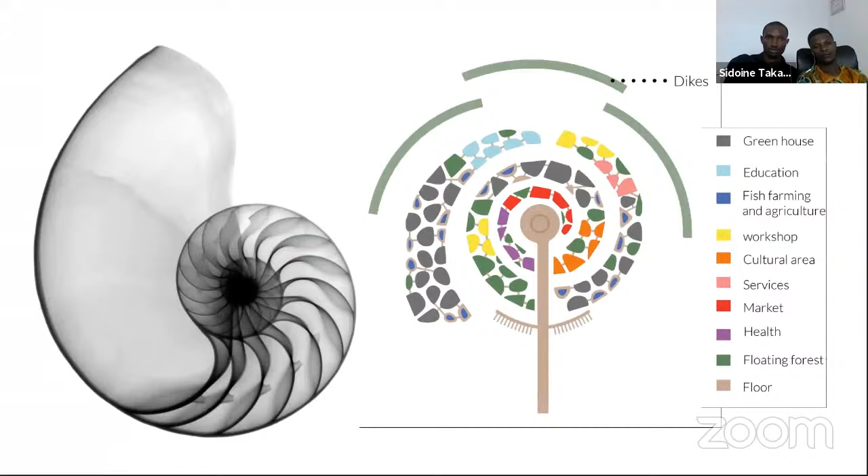For our floating mini city, we were inspired by the Nautilus shell, a marine species whose shape is a spiral respecting the golden proportions that allow the most stable forms in nature. This spiral has been judiciously parceled out to facilitate the circulation of water and to house housing and basic services such as education, health, a floating forest, workshops, a market, community space, services, a pontoon, cultural space, and aquaponics.

The land approach consists of developing the coast while fighting against coastal erosion. Firstly, under the effect of the waves, the dune shifts, so we installed geotextile tubes near the shoring, which allow the shoring to be enlarged by a natural gain of sand and favor the proliferation of coral reef. Then, to reduce erosion due to the anarchic displacement of the coast, we created a dune cordon which contains the displacement.

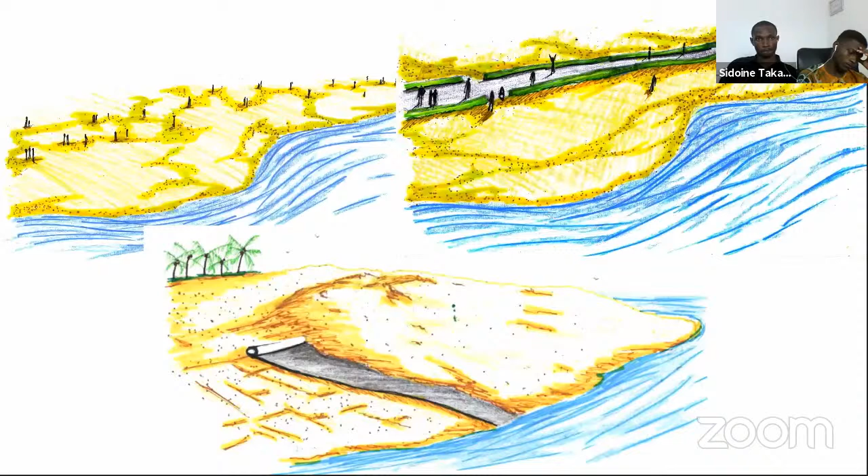Finally, we installed geotextile to protect the surface of the soil from stresses due to water movement, wind, or rainfall. This tile represents the synthesis of our land-sea approach.

Here we have a better appreciation of the overall plan of the project, where the housing component has been the most developed. The housing is inspired by a junction combining the mushroom and the traditional construction of the Yoruba people, creating a bionic, vernacular, and community habitat.

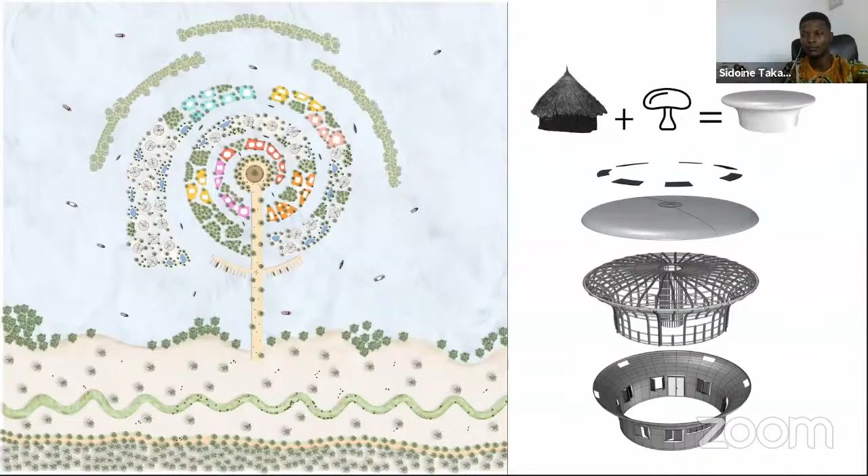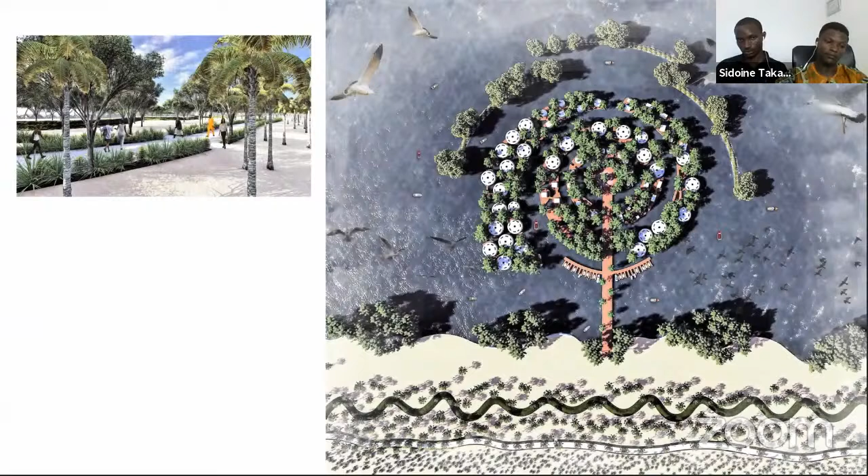The exploded model of the shelter shows us the local materials used, which are wood, bamboo, and textile. Just as the dune cordon protects the shoreline, as observed in this first image, the establishment of mangroves also contributes to fighting coastal erosion through their long roots.

A closer view of the dwellings allows us to appreciate their simple and minimalist form, respecting the local way of living. The design allows good transverse and natural ventilation, good zenithal lighting, and especially the recycling of rainwater. In the logic of sustainable development, we integrated the concept of zero waste at the biological level by creating a system of recycling material to obtain reusable natural compost.

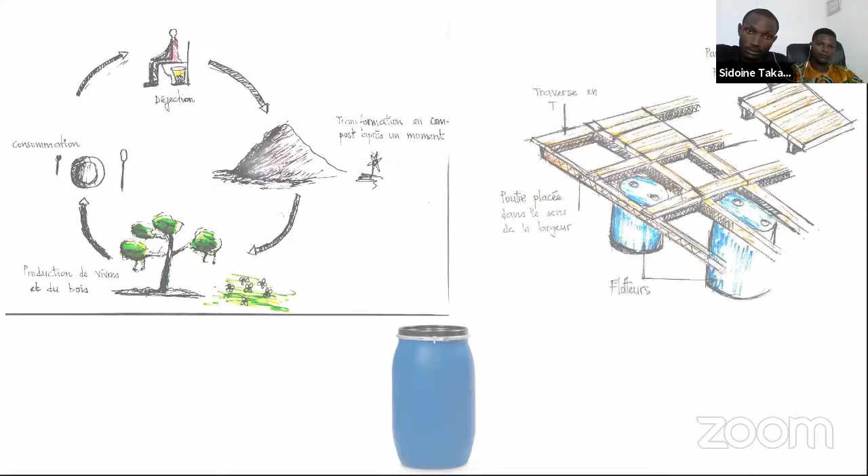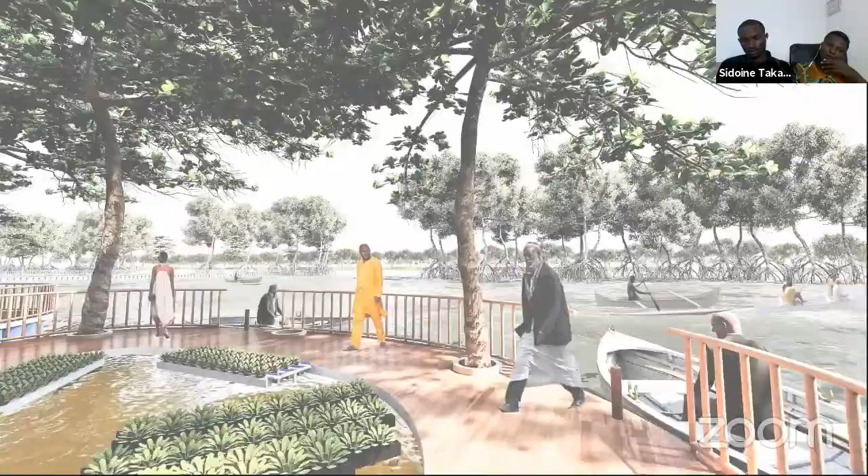The African culture is based on the community spirit, so we proposed this central space of exchange where a variety of cultural activities can be organized. We also have spaces for recreation.

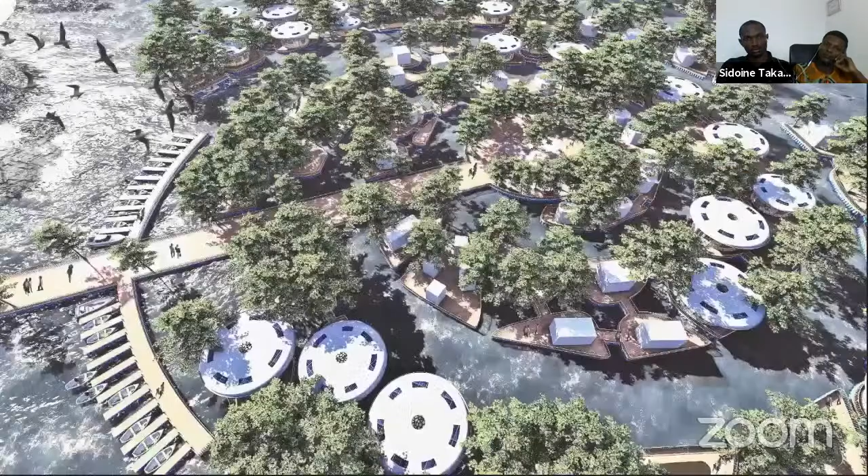In conclusion, the problem of sea level rise and climate change is a phenomenon that architecture today is giving itself the means to solve, both by restoring unstable ecosystems and by offering new perspectives of construction on water. Thank you for your attention.